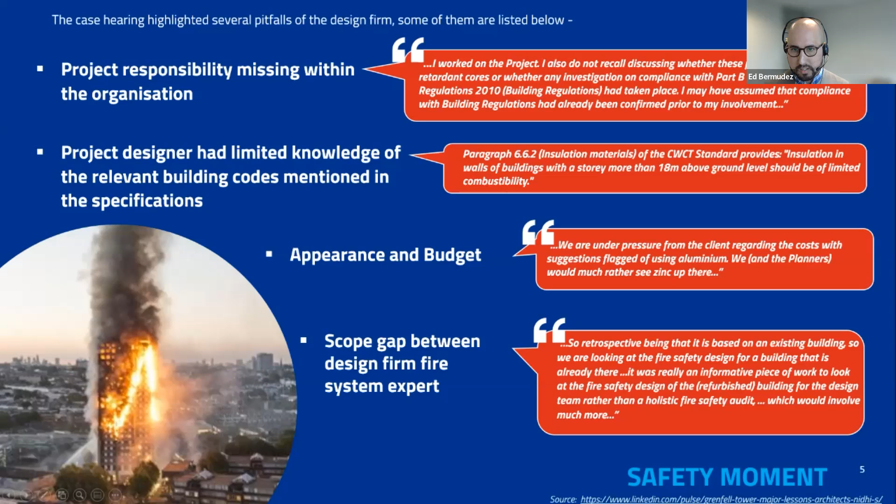Some of the things that were heard in the hearing: they reckon that, being based on an existing building, so we're looking at the fire safety design for a building that is already there, it was really an informative piece of work to look at the fire safety design of the refurbished building for the design team rather than a holistic fire safety audit. And it's just a reminder that whatever we are requested to design, it's never in isolation. It is a system, and we need to consider it as a system. So hopefully that sets the scene and resonates with some of the things that we're going to be talking about today. So a little bit about myself and the company I work for.

Thanks, Graham. So yeah, Worley is an international company. We actually now have 42,000 people across the globe. In New Zealand, we are a smaller group, around 350 people. About myself specifically, I'm originally from Venezuela in South America. I'm a mechanical engineer, and my background mainly comes from reliability and maintenance. But I've been involved in mechanical and infrastructure projects in South America and the Middle East, which is where I met my Kiwi wife and made my way over here to this beautiful country. More lately, I've been managing projects in a number of industries here in New Zealand, anywhere from pulp and paper, infrastructure, ports and marine, food and beverage, and other things. Even though I come from an oil and gas background back at home, I've been fortunate enough to be exposed to a lot of different industries.

But lately, I've been heading the digital strategy for Worley New Zealand. And I'm going to give you a bit of a spin on how we live in a fantastic time where there are digital technologies that are making it easier to bring everyone on the same page. So that's going to be the theme. And we have been fortunate enough as Worley to be working closely with WorkSafe and Engineering New Zealand in trying to wind up the awareness of safety in design and trying to bring a safety in design culture across our profession.

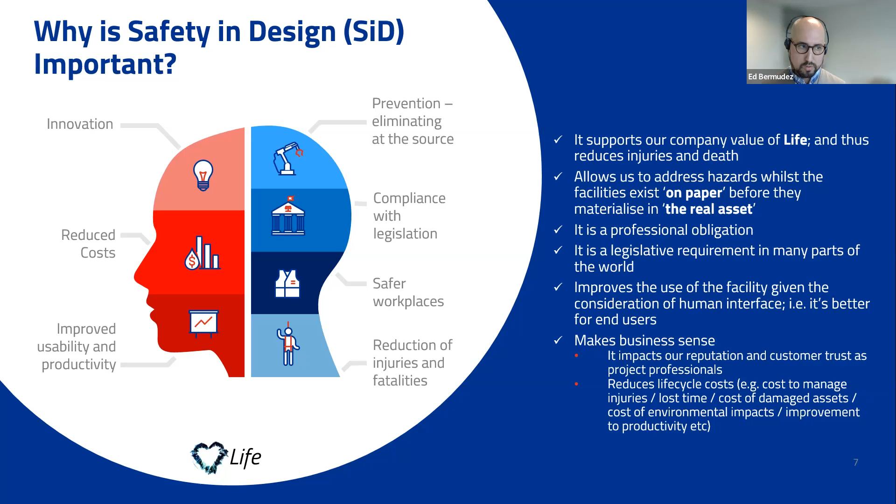So there are a few major incidents which have occurred in the last 50 years, and many involve multiple fatalities to site personnel, and some involve fatalities in the community. And these have actually shaped the way we now design and engineer things. Each of these has had major implications for how we perform tasks related to safety in design. For example, from the industry that I come from, the destruction of the Piper Alpha platform resulted in the formation of the UK Health and Safety Executive and the development of the requirement of a safety case.

Some of you might be familiar with process safety. This was also applied in Victoria, Australia following the Longford fire in '98 with the establishment of the Major Hazard Facility license. A little bit closer to us, the Fukushima nuclear power plant incident highlighted why we need to design considering also the high-consequence events, those that are possible but not likely. We also need to consider them.

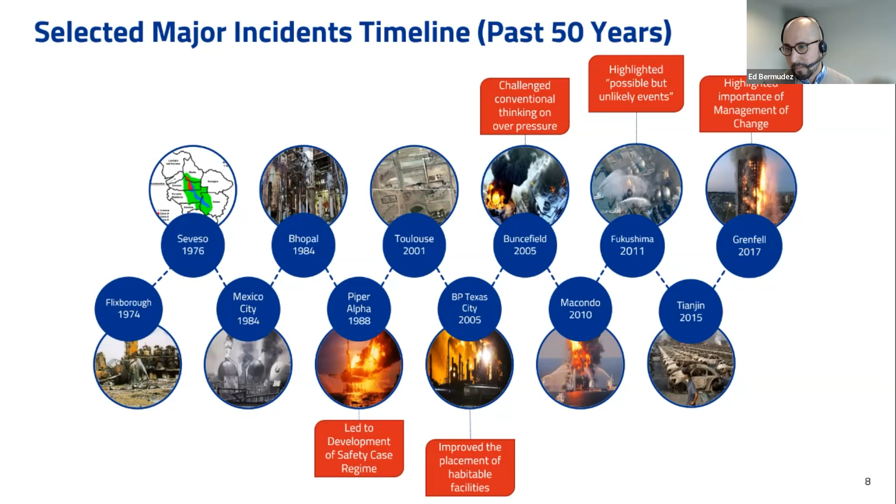And as we talked about in the safety moment, the Grenfell Tower fire exposed failure in the application of management of change to older buildings. And the review found very complex, siloed regulatory systems which were at times contradictory. Many of these major incidents prompted significant changes to national workplace health and safety laws, which were adopted across other jurisdictions. And we are very aware of that. And we have regulatory bodies that are always keeping us honest. And these exemplify why safety in design is so important for us.

So Worley has what we call a SEAL framework, and it is described using this figure that I've got here. It has a strong foundation centered on people and compliance, a sound culture, that we've got the right leaders, properly educated people dealing with the right thing. We make sure that we're compliant with the local laws, obligations and standards. And it sits on three pillars that support that roof. One of them is safety in design, which I'll talk a bit more about.

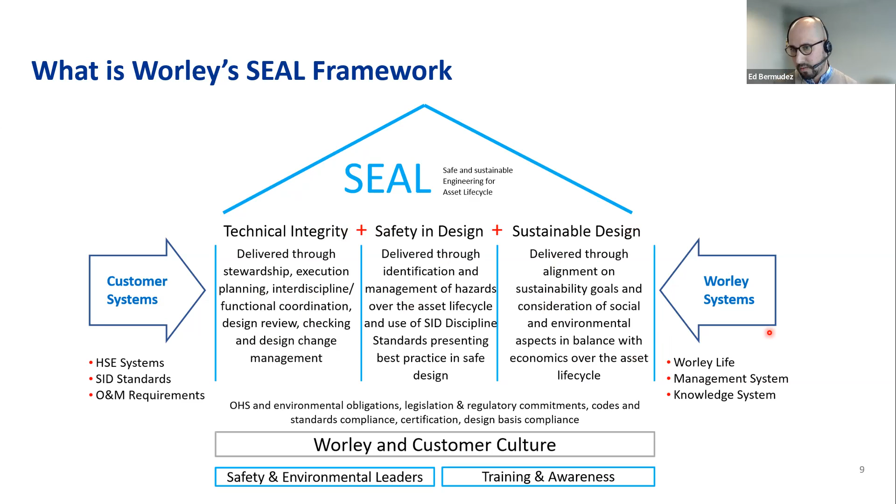But we also have technical integrity, to make sure that we have a sustainable design. More than ever, everyone's being scrutinized about the sustainability of the things that we're designing. And at the same time, having the right systems, from the customer and us as designers, making sure that they're being applied. So, the SiD pillar, which is what I'm talking about today, we deliver it through identifying and managing the hazards over the whole life cycle, and using specific discipline standards so we can present best practices for safe design.

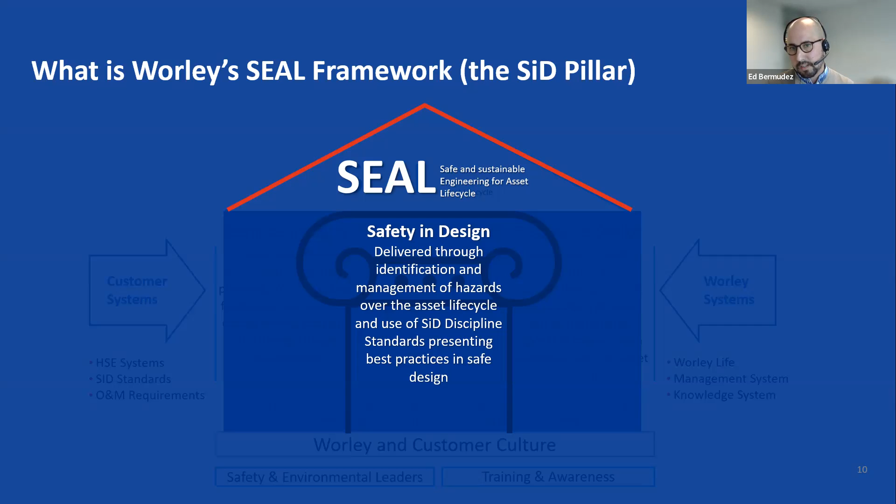So what do we really mean by safe engineering design or safety in design? There's a few definitions out there, but I'm just going to name a few just to get us all on the same page. SiD encompasses the design effort that manages the source of the hazard that's being exposed. So we want to make sure that we identify the risks from its source and try to manage it.

It involves the integration of control measures early in the design process, so we can eliminate it if possible, and if it's not practical, at least minimize the risk to health and safety throughout the life of the asset. It focuses on addressing, again, hazards during the design process. So going back to, let's understand where the hazards are as early as possible.

And some of the outcomes can include what a lot of us would call fail-safe design. So anticipating when a problem can occur and making sure that it fails on the safe side. And it improves safety via communicating how to use design safety to the actual users, because if we're not close enough to the people that are going to be using, maintaining, decommissioning and even constructing this project or asset, then we're going to be missing out on addressing things at the early stage.

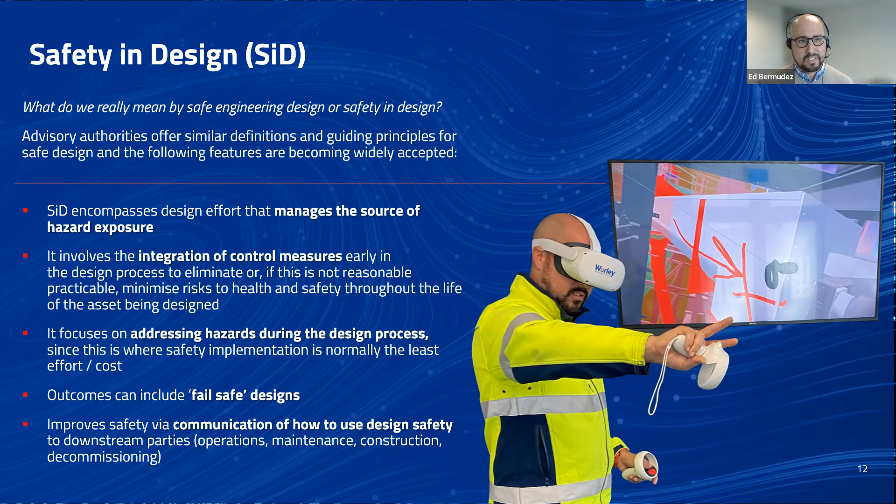It feels and sounds a bit trivial, but more often than not, we are asked to redesign things late in the piece, and it just becomes more costly. So I'm making emphasis about learning from major incidents because they're the best source of information to avoid things like that happening again. In the context of safety in design, a major incident is defined as an event that's typically catastrophic, involving the loss of containment of hazardous material or a fire or something really catastrophic.

And as practicing engineering and design professionals, we have the duty to familiarize ourselves with these major incidents and the learnings from them, because as engineers, we should be curious by nature, and nowadays there's so much information out there that there's pretty much no excuse about the availability of information. If anything, the problem is that there's so much of it.

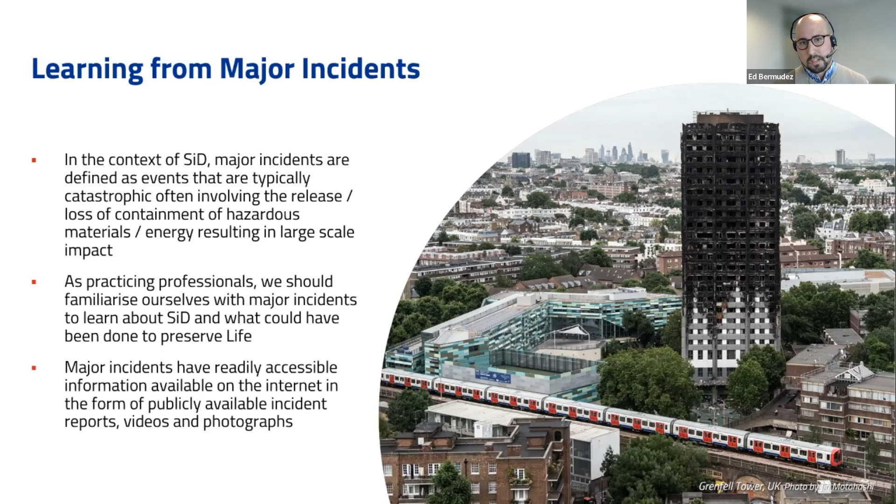So in that sense, this is coming from our SEAL standards, and safety in design is a set of activities defined under the overarching process that include the integration of hazard identification and risk assessment methods early. And I keep coming back to the early in the design development. This creates opportunities for engineers and designers to eliminate or minimize the asset lifecycle risks through their design efforts and deliver safer design solutions.

We want to make sure that whatever we're designing, we are considering how it's being fabricated, how it's being installed, how it's being constructed. Is it going to be safe to be constructed, operated, maintained? And after that, as it has reached its end of life, is it going to be safe to decommission and demolish? We've learned a lot about certain materials being used in the past. So obviously we don't use asbestos anymore, but we need to think about all the way there.

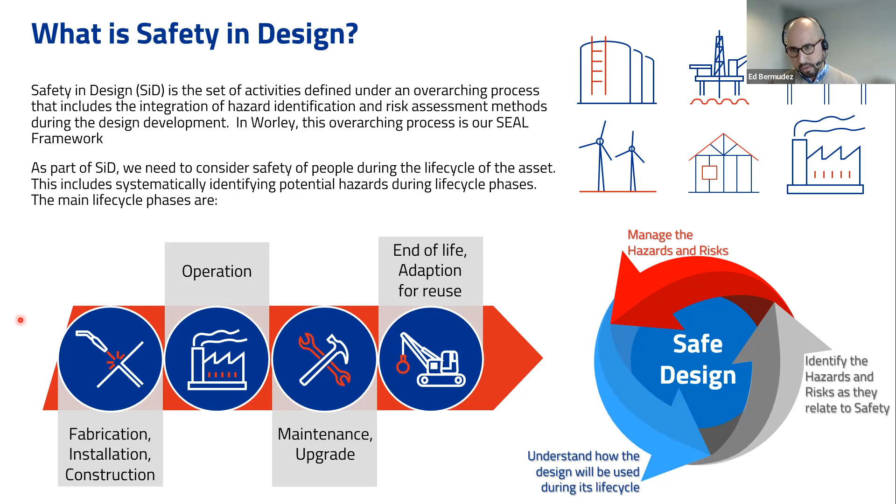And yes, there's going to be pressures about costs and budgets, but if we at least consider it and communicate it, then we can make an educated decision and we qualify the decisions that we make. So there's two lenses that we can identify safety in design with, but they both have the common goal of reducing hazards, right? And there's one thing that influences both.

So process safety: the language of process safety is explosions and fires and fatalities and major incidents. And some of the systems and procedures that are used to try to identify and mitigate these hazards are design reviews, management of change, terms like as low as reasonably practicable, risk assessment and things like that.

And then occupational safety is all about making sure that while things are being maintained and operated, we are providing ergonomics and minimizing slips and trips and stuff like that, how people are actually interacting with the asset. But what is common between these two is that at the end of the day, it's the human-asset or human-machine interaction. And that's the risk. Can we try to eliminate an interaction that is potentially risky? That's what we need to be looking at.

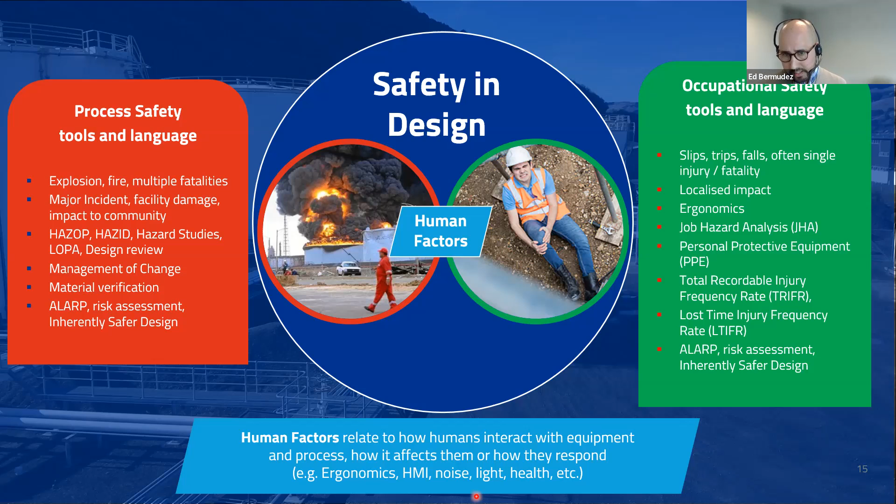And it is the intent that we compare the aspects of safety in design to health and safety. Often different teams have different focus. Operations may be more concerned about health and safety, and design teams and process engineers may be more focused on process safety and the major incidents.

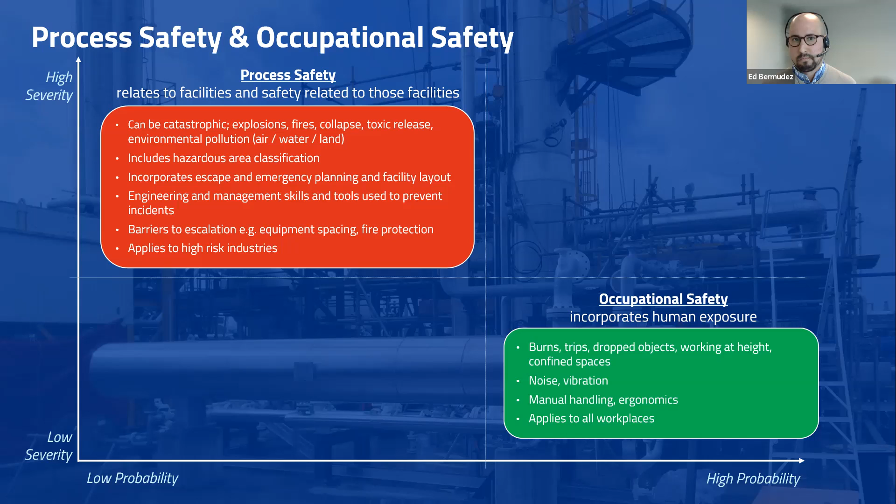So it's finding that balance between the high probability, low severity things of occupational safety, which is not always the case, but it's sort of why, generally speaking, that's the case. And how do we balance the high severity, low probability risks? I'm going to give you an example and why it's important that we have all disciplines apply safety in design practices and are considering each other.

Let's say, for example, we are tasked to design a fuel tank for a transport depot or an oxygen tank for a hospital or something. We've got quite a number of disciplines playing a part in this, and unless we understand what the other discipline needs, we might not be setting them up for a safe outcome. Say on the process safety side, we might need to understand the likelihood of certain failures or having a loss of containment and how to react to that.

On the electrical side, we need to ensure that we've got sufficient power and there is a backup supply. If something goes wrong, the process people or the instrumentation people were relying on a critical level sensor that doesn't have power anymore and then wouldn't react. And then on the mechanical side, we need to make sure that the material strength is suitable for all the different pressures to make sure that we don't have a loss of containment.

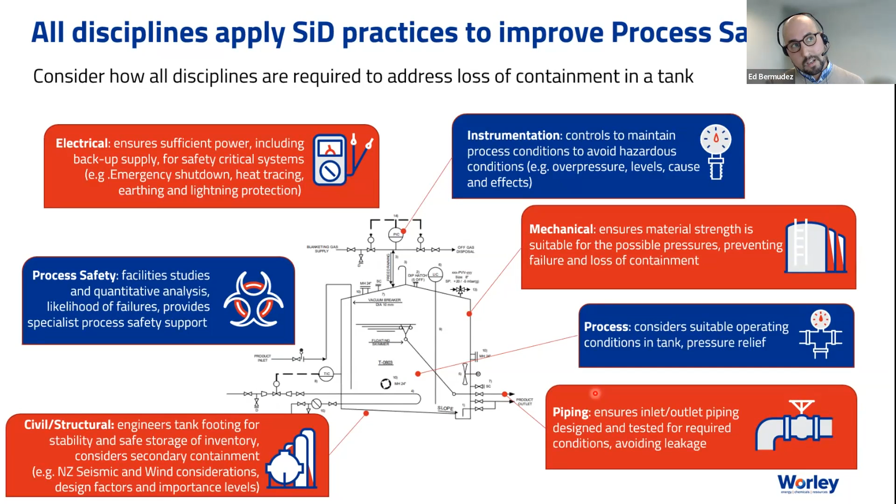Especially here in New Zealand, all the seismic and wind considerations that we need to have. Are we sitting on the right structure? Is it compliant? Are we reusing an existing system? So all of these things will affect one another. So if we haven't, say, considered the implications of piping movement or expansion and compression of these pipes, and how flexible the tank is, for example, all of these things will have an implication. So unless we at least have processes in place that will trigger us to ask the right questions to the right disciplines, then we will miss some of these things.

There are several principles that apply as part of safety in design, and some of these are actually in legislation, in HSNO, and the Health and Safety at Work Act. So it all depends on what we're trying to achieve, but we can use what-if analysis, so we can consider all possible events. We can identify the hazards and the risks, and how we would mitigate them if it was the case.

And it might be the case that we cannot practically mitigate or eliminate some of these, but the fact that we have identified them helps people like first responders. Say in Grenfell, if there was sufficient information about the cladding and how it could fuel the fire further up, maybe there would have been different approaches. The hierarchy of control: how are we going to address the hazards? Can we eliminate them from the source, or is it not practical and we want to use PPE or administrative controls?

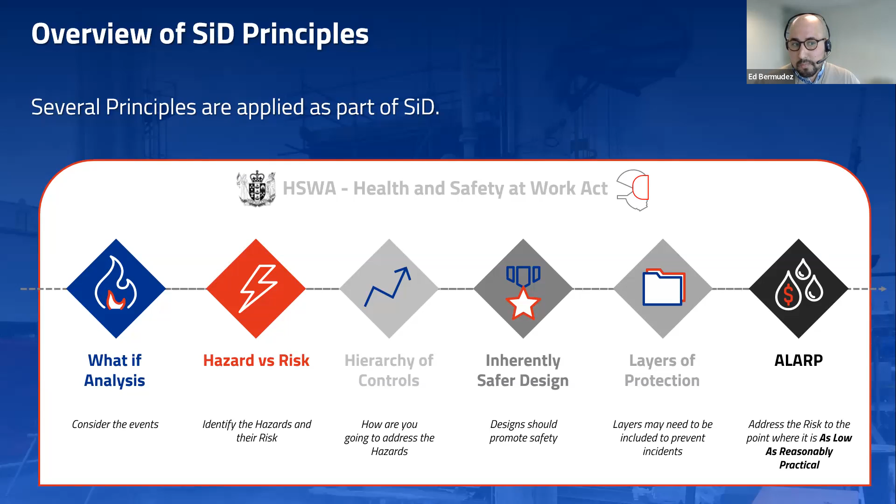We want to make sure that, as much as possible, we have safer designs from the very beginning, and how do we encourage and promote safety with the things that we're doing? Do we have layers of protection? And, as much as possible, address the risk to the point where it's as low as reasonably practicable.

Now, a few more thoughts, and these are some of the things that we have in our toolbox to help, because at the end of the day, this is a people's business. So we're trying to keep people safe, but we also have people doing the design. People that are under a set of expectations and work pressures and schedule pressures and budget pressures. So we have to acknowledge, the same way that we're trying to design something safer for an operator, that as designers and engineers, we're not isolated from the work that we're doing.

So how do we support and have systems in place to help prompt the right questions at the right stage, from the planning stage all the way to execution? Every project will be different, but as a minimum, we want to make sure that we can define design criteria from the very early stage, that we can agree with the customers, the users and the stakeholders on the basis of our design, and there are certain prompts for it. We've got hazard identification standards, HAZOP standards, design review, how we're going to be reviewing our design, and at what stage.

Each discipline, in our case, has a set of safety in design standards that prompt us to do certain things. If we're dealing with hazardous substances or hazardous areas, there's a standard and checklist for it, and for how we're going to be managing risks and identifying them, which is very, very important. So a few more thoughts.

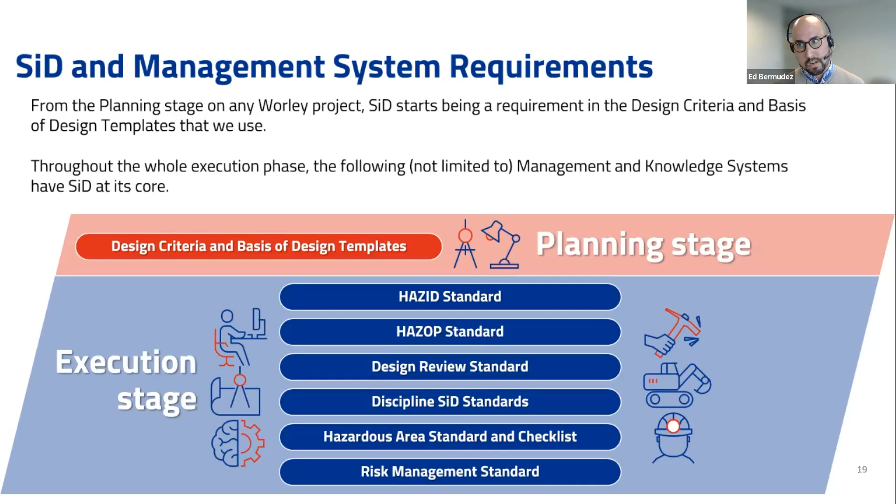I've been in projects where we've agreed on a certain pipe rack or a conveyor that needs to go from here to there on a 2D drawing, and the stakeholders have signed it. And then when we're constructing, they're stopping the job because, no, I can't accept that. That's too low. I need to have clearance for this forklift to come in and out. I said, but you signed this here. Yeah, but I didn't appreciate it was this low. So let's use as much as we can the same language so we've got the right stakeholders identifying things at the same time.

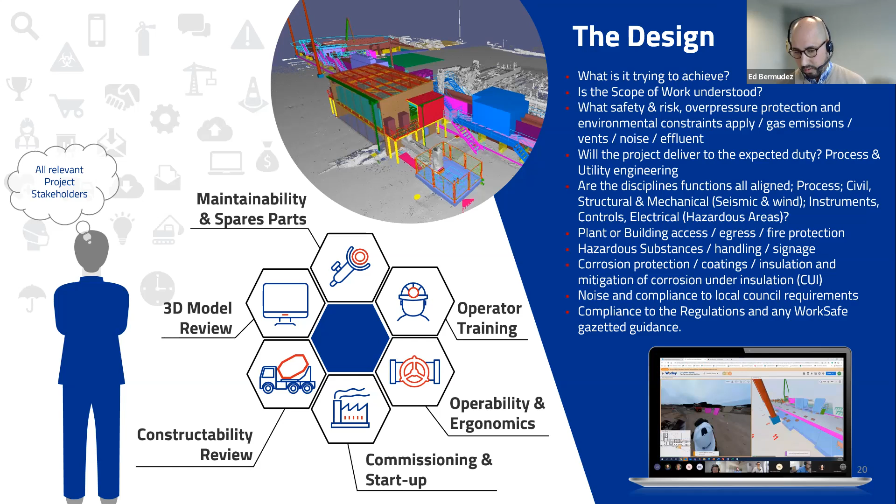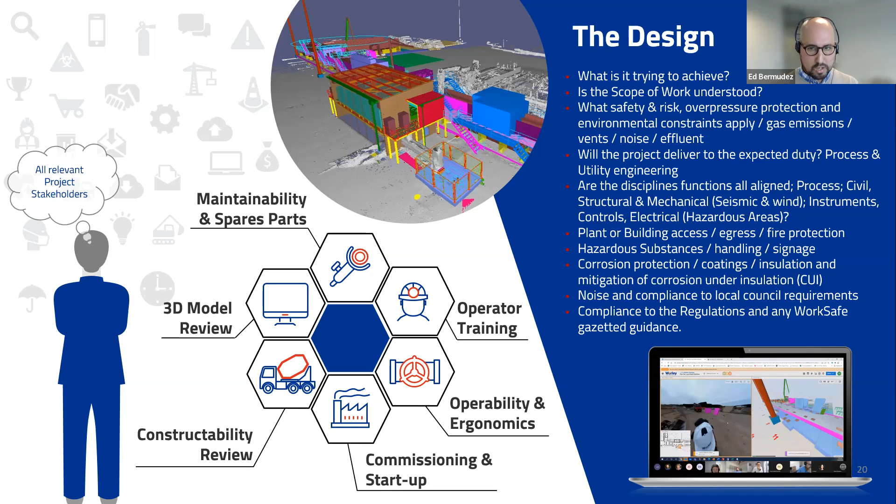And some of these things are: does everyone within client and designers understand what we are trying to achieve? Is the scope of work understood? Do we understand what are the safety and risks, overpressure protection, if we're trying to design a pressure vessel, for example, or are there any environmental constraints that we need to know? Emissions. What is the duty that we're trying to do? When we're designing process systems, there's a whole bunch of things that we want to make sure that we understand early, and we agree on from the first time.

So I'm going to show a few use cases, and again, I'm going to give it my digital spin, just to show you that nowadays we've got tools that would help us. And I think the bottom line is ask the right questions at the right time, early enough, and as much as possible, try to communicate with the right stakeholders in a language and illustrating in such a manner that they can see what's going to happen. That example of 2D drawings and people signing off things and then realizing, oh, I didn't realize. So we can start with some key lessons from something really simple.

Like in this particular case, the detailing of a step near a doorway was just omitted. Whoever was designing that just didn't think about the fact that we had a step straight away after opening a door, and because we needed to have a drain there, it actually caused a trip hazard. So there was an incident, someone fractured their ankle, and then it became quite a big problem. So the root cause was a poor detail and lack of identifying the hazard and controlling it from the beginning.

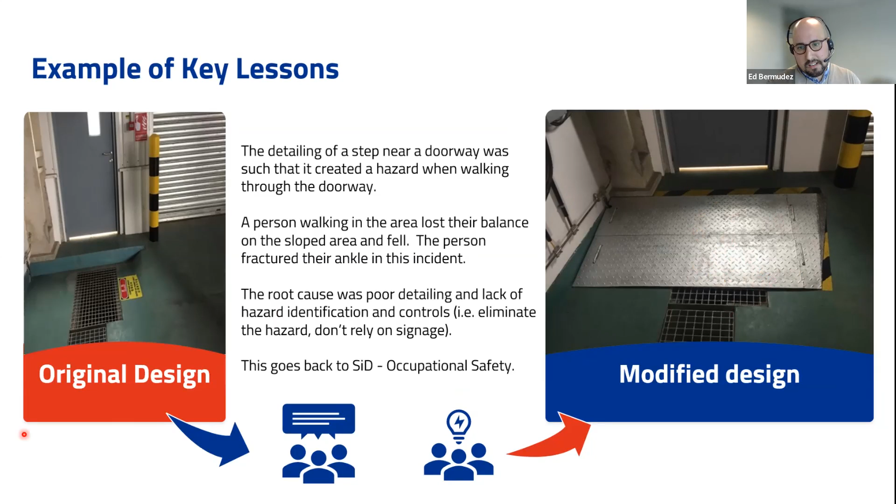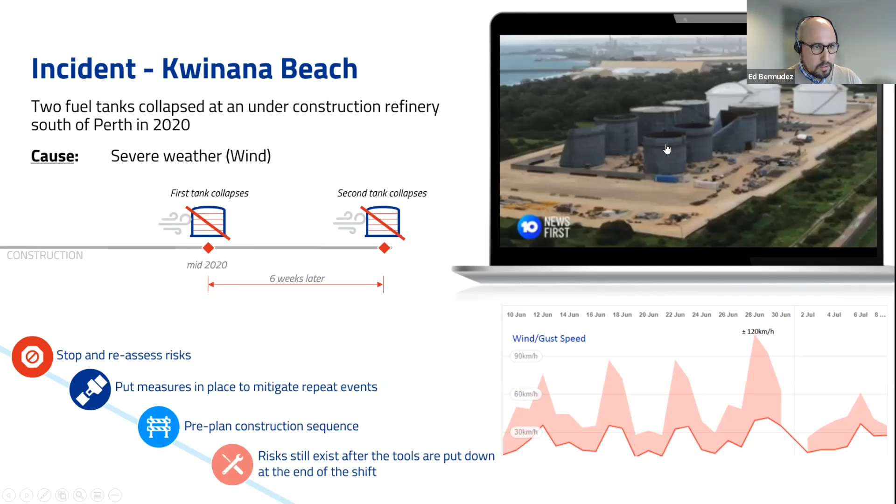On this particular one, I just wanted to show you something. Let me just change the laser pointer. Hopefully we can get to see this quickly. So this was an interesting one. It's a couple of fuel tanks that collapsed under construction in a refinery in Perth. And I guess I think the news report was not going to go, but the interesting thing about this is that they had a first tank collapsing in the middle of construction, and then 6 weeks later, a second one collapsed.

So just think about, obviously, the reason why the first one collapsed: did they have the right constructability review for that particular area, assessing the wind? But then second, after the first one collapsed, nothing was done to first identify what happened, and then to prevent it happening with other tanks, and it actually happened again.

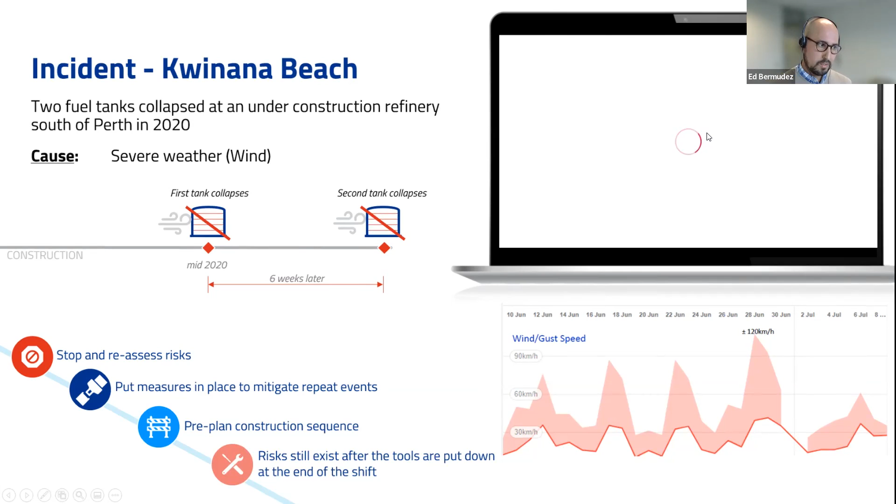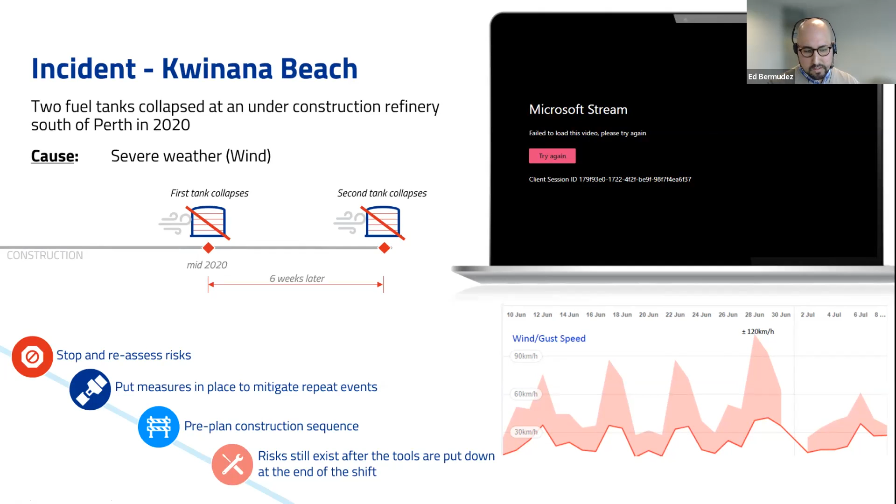So, again, when something does happen, stop and reassess the risks, put measures in place to mitigate similar events, pre-plan a construction sequence as much as possible. And those risks that still exist after tools are put down at the end of the shift, you have to also consider those, because it's not a matter of there's no more workers there anymore, that's all right, she'll be right. That's the sort of thing that we need to look after.

This is an oil and gas example, but I think the generic principle is actually quite a good one, because for this particular one, a client was building a separation loop for a petroleum facility and needed a 30-meter vertical stabilizer column. Normally, these things will be built and then they will be dressed up after they're erected. And what I mean by dressed up is putting all the peripherals and the walkways and all this sort of stuff. But that costs money. It means that you need to scaffold the thing. You need to make sure that it's safe for the fabricators to do the job.

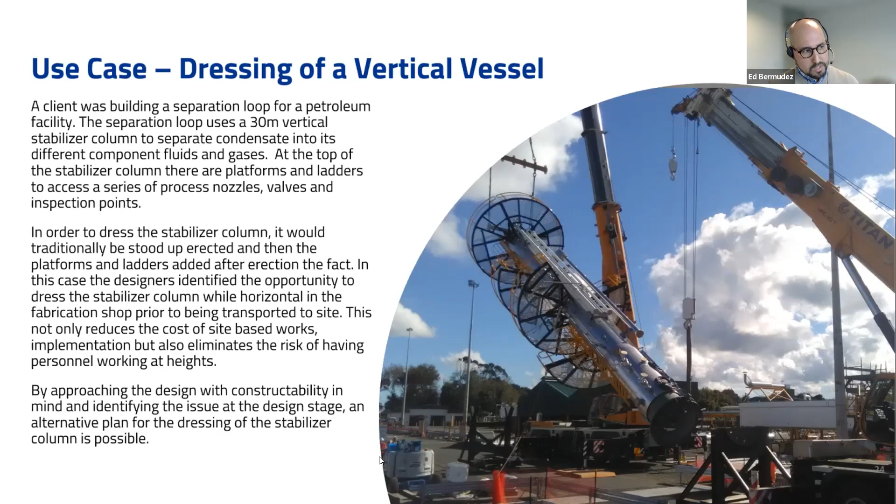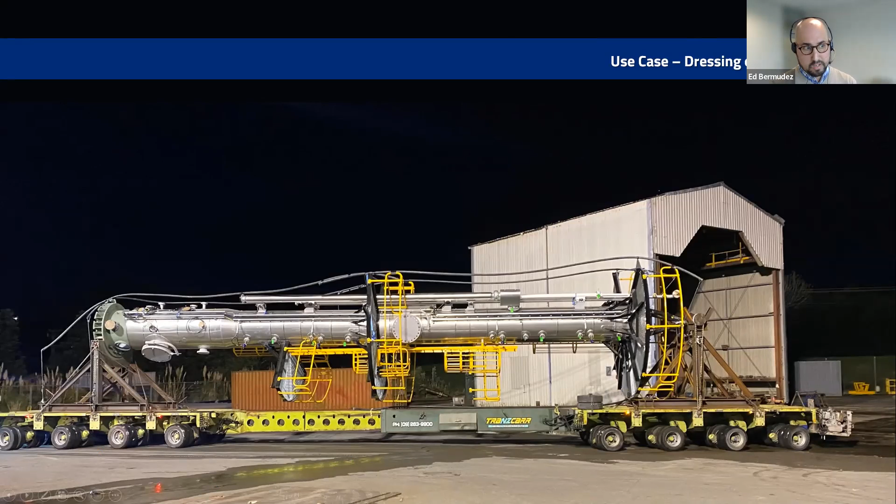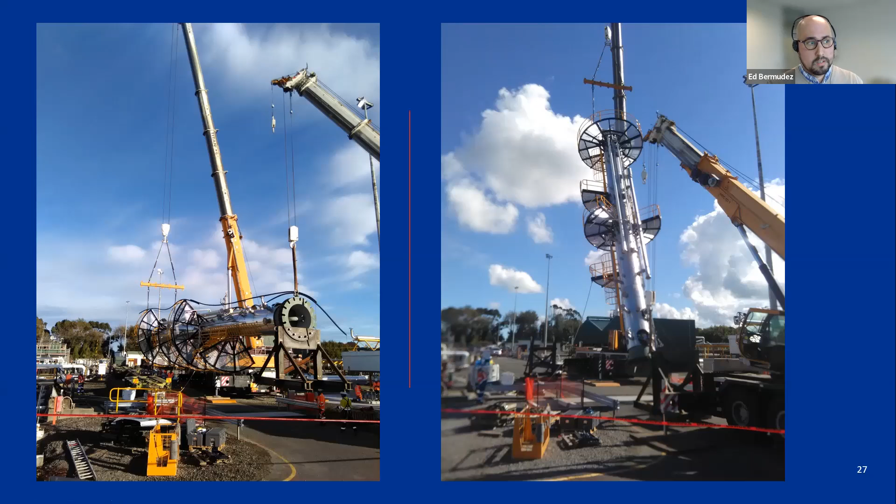But by approaching the design from the very beginning and considering constructability at the early stage, the team was able to design it in such a way that we could dress it up while horizontal. And not only that, they also considered how to transport it, so it could be transported safely, and tried to minimize the amount of site work. And it was quite fascinating to see how that was addressed at a very early stage, and then the erection and construction was properly planned, and it could be done on budget and on schedule.

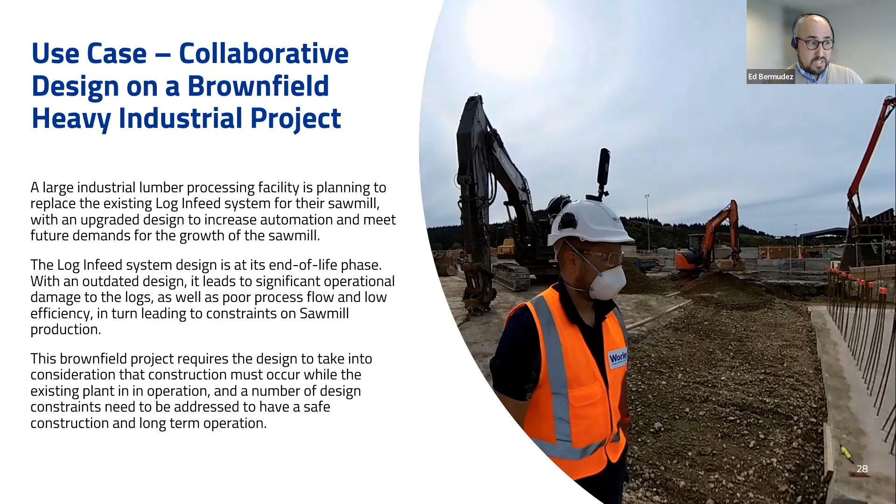The new log infeed needs to be constructed right beside the existing operation. It's twice the size, and we're going to have to construct this while this is still in operation, because we only have a 2-week shutdown opportunity to do the integration here inside the building.

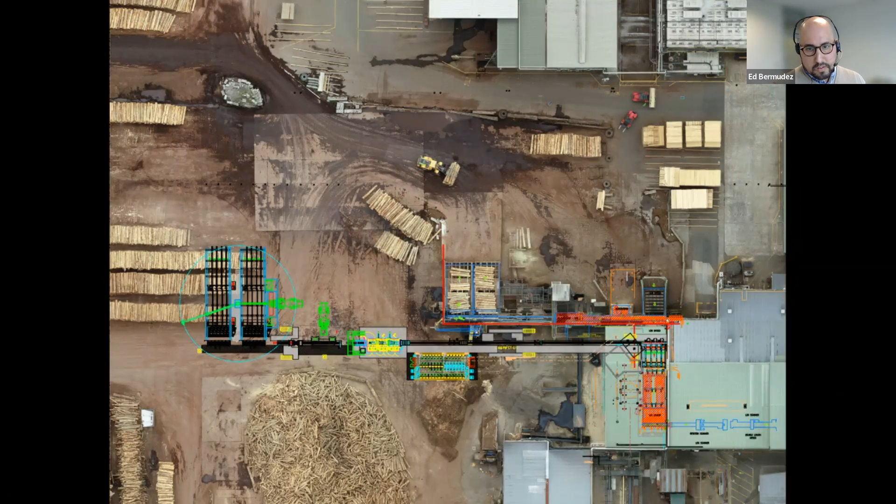So this was a very interesting job because we actually managed to get hold of aerial footage from when the original plant was built. Luckily, some of the colleagues in our office used to work for this plant in previous lives, and they knew that there were certain things in demolition that weren't actually removed. So in this particular case, the concept was that we were going to provide power from an electrical room over here, and we were going to trench and go over here.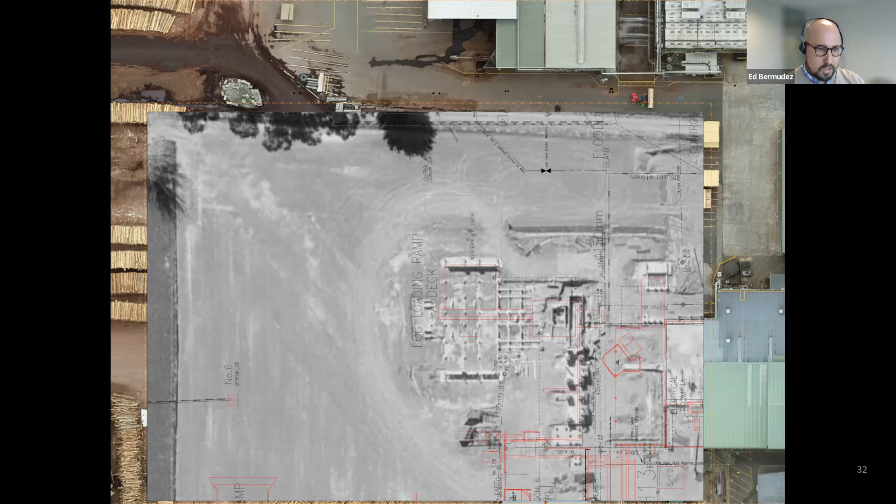We actually managed to get hold of the old 1970s drawings, and we managed to model it, and we could early in the concept phase make the change from providing power from here to running a cable over here and putting a new transformer for power in the switch room here. So I guess, again, having that prompting of how we're going to construct this safely while this other plant is still being operated was key for this.

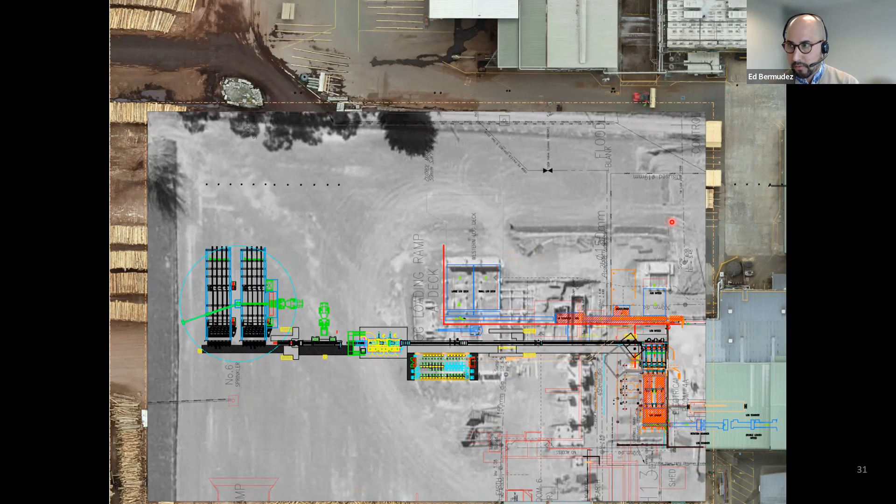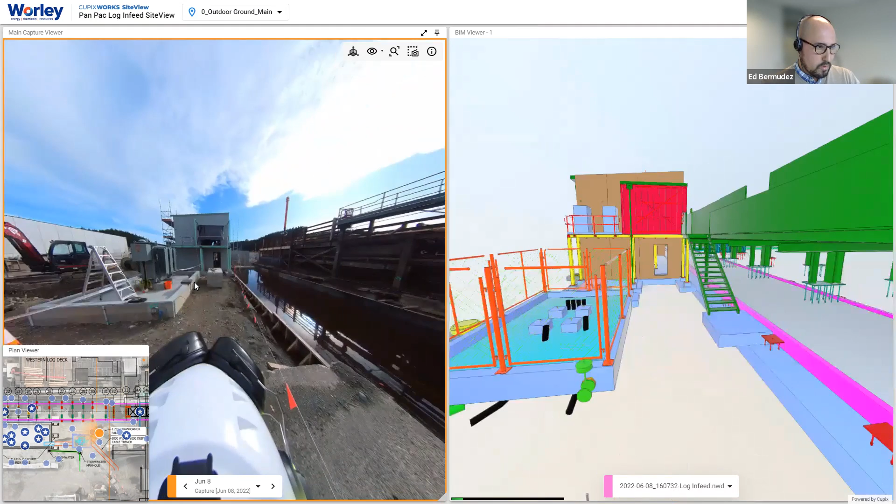So I wanted to show you something quickly before we finish the presentation, just to give you the idea of how powerful technology could be to make decisions. Nowadays, we're actually able to capture the construction as we go, and we are able to have constructability reviews with the right people, showing what's going to be in place and making decisions about how we're going to place specific precast members or how we're going to lift them.

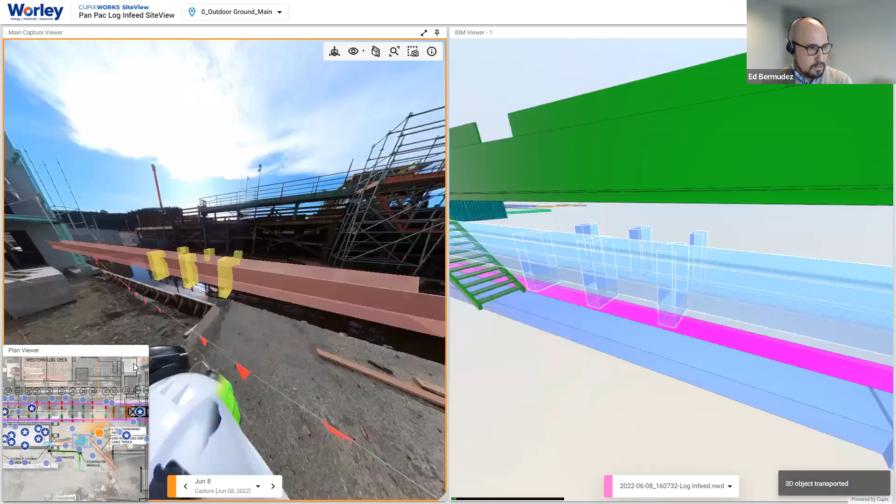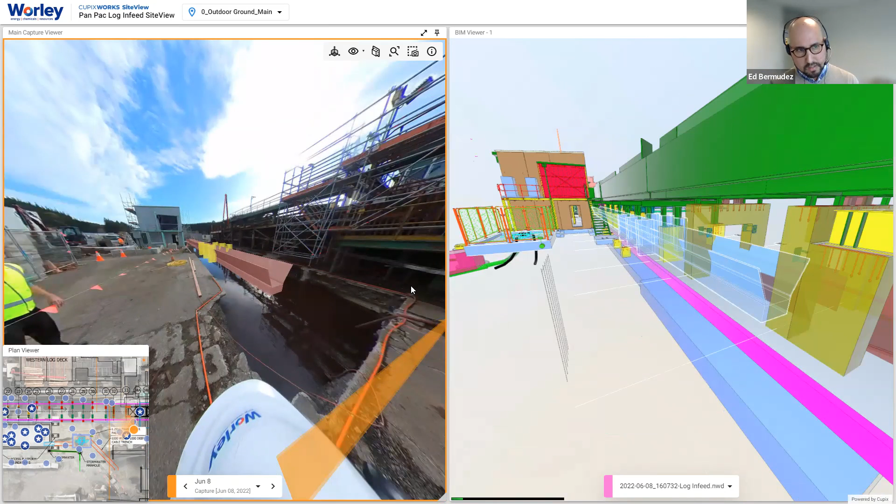We can actually push things into place and transport it and make decisions, things like these temporary walkways that needed to be scaffolded. We were able to plan the scaffolding before, put them in place within the scan data and make a decision. And with these things, we're lucky enough that we have been working with these for quite a while. Because we're already designing in 3D, just placing this into reality provides a different level of context for people.

And that has meant that we have been able to be agile in the decisions that we're making when the contractor's been excavating and finding things that we weren't anticipating, because everyone is looking at this at the same time. And I haven't even talked about how COVID has affected the last 2 years' worth of our projects, where people are not allowed to be on site and make decisions. So nowadays we can actually capture site and bring context to people without bringing people to site.

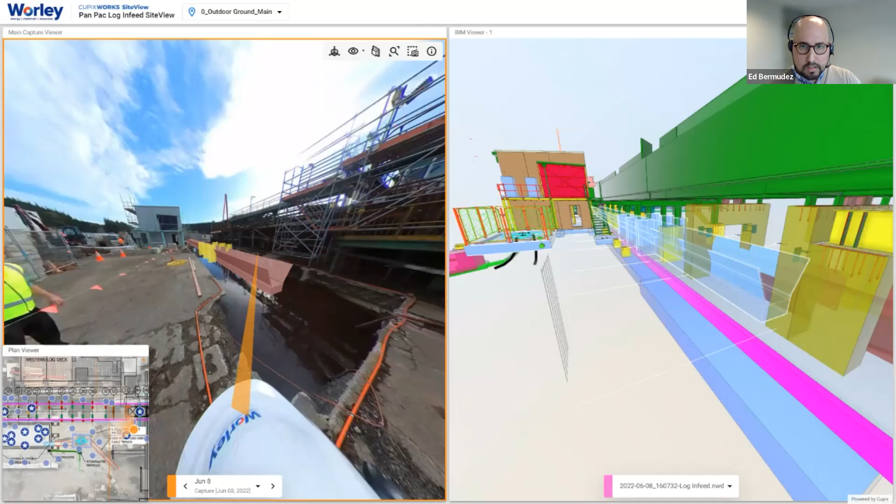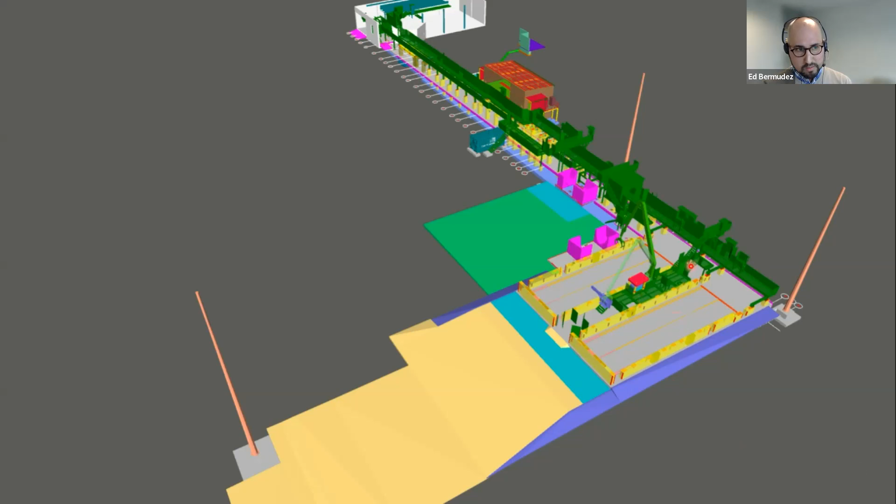With that, I just want to give you a little bit of context. So the green stuff has been designed overseas. We are in charge of designing all the other stuff to support that. And again, we're bringing that context to the people in Austria that are designing this, who have been engaged by the customer, and we can actually bring them the limitations that we've got on site. We have been able to make decisions.

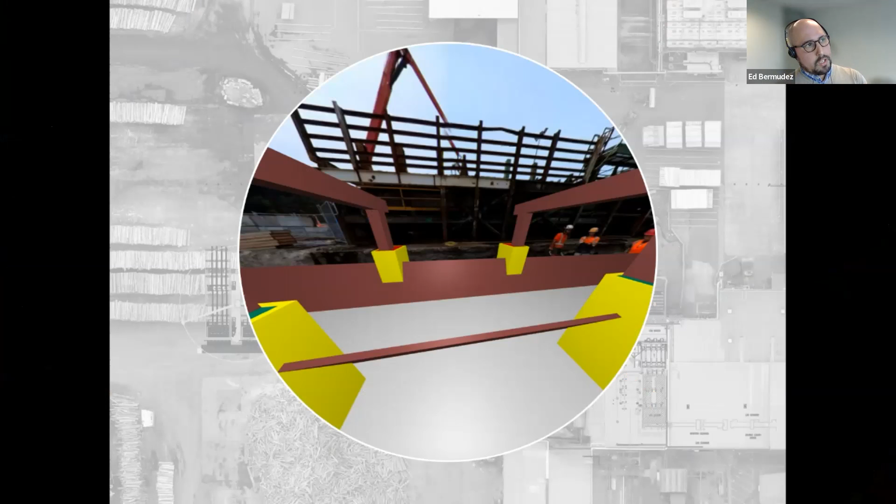Look, with that, I want to make sure that we've got a few minutes for questions. I want to show you one other thing, and I know this is oil and gas related, but it shows you the power of technology if we can bring everyone on the same page. We had a situation where we were asked to design the integration between an offshore gas platform and a jackup rig that was overseas and was going to be used for a new drilling campaign.

The rig was berthed in Scotland, and we got someone to scan the whole rig and give us a 3D scan of that rig, and we were able to design everything in 3D. But we designed based on what we captured statically, what was there. Now, we weren't aware of things that needed to move within that rig. So how do we get that input? I'm going to show you a quick video. It's 2 minutes, and then we'll get into questions and answers.

But this. Oh, sorry. Trying to get there you go. Laser pointer.

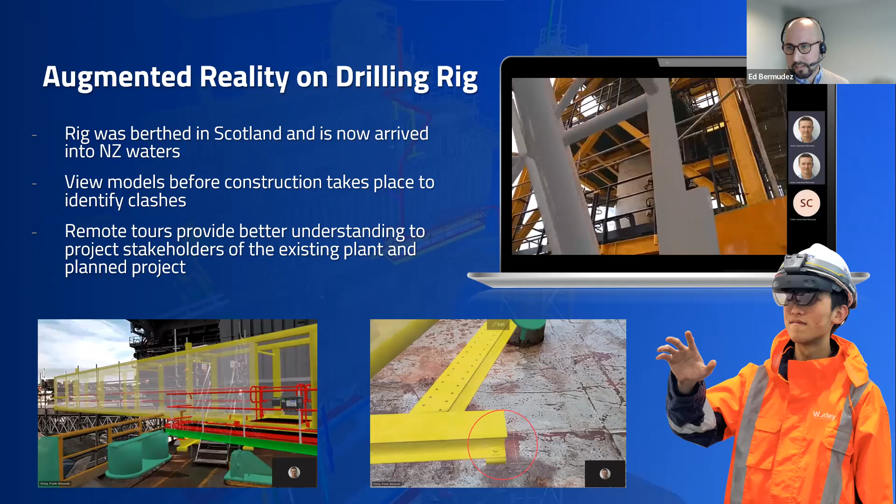And with that, hopefully I haven't bored you too much. Just want to finish with some final notes. So I cannot emphasize enough, plan your work and work the plan. Very important. Ensure that all the project participants and stakeholders are fully informed of all necessary project information as early as possible.

Investigation into the causes of man-made disasters is an invaluable source of information to make sure that we minimize the likelihood of things like this happening again. And safety in design is aligned with safe and sustainable engineering for the whole facility asset lifecycle. And that's me. So hopefully we've got a few minutes for questions.

Ed, that was a very passionate discussion, and with all the 3D, I think that's a unique way to do things, and I'm doing a little bit of that myself with 3D scanning. But I like the plan your work and work the plan. That's a very important part of engineering, is checking. Now we've got 2 or 3 questions here, so I'll just fire them off.